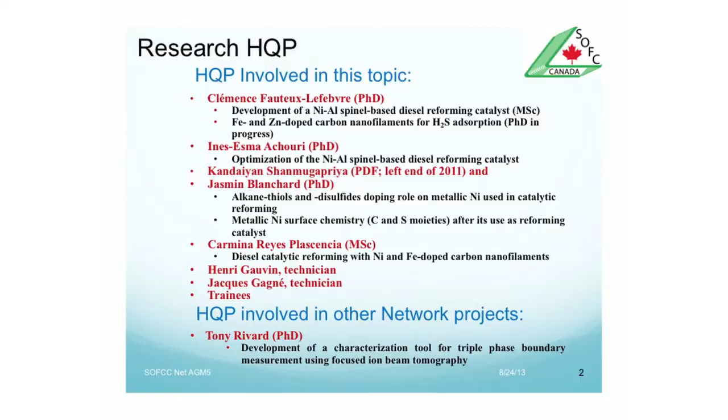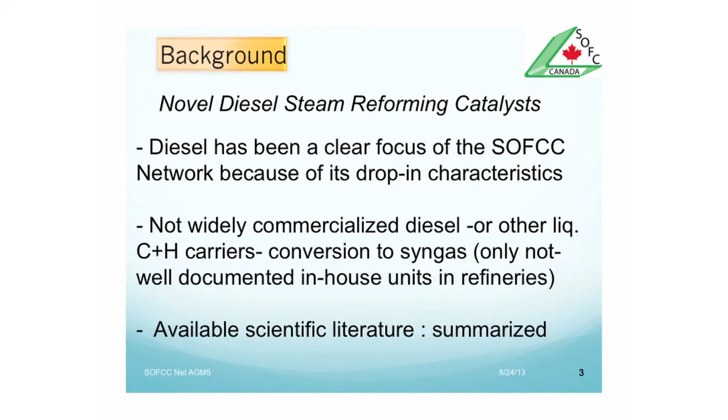So the background regarding the target of the SOFCC was to develop novel steam reforming catalysts. The reason for the focus of the network on diesel is because diesel has very good drop-in fuel characteristics, and diesel conversion to syngas technologies are not widely commercialized. There are only in-house technologies developed by refineries which are not essentially publicized or documented in the scientific literature, as well as other components like methane. And there is some scientific literature which will be summarized.

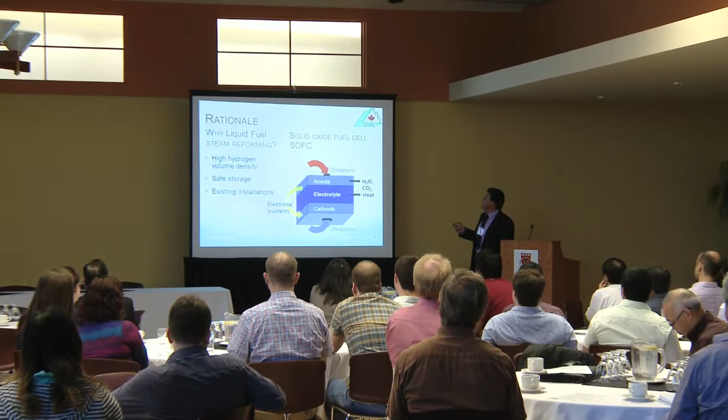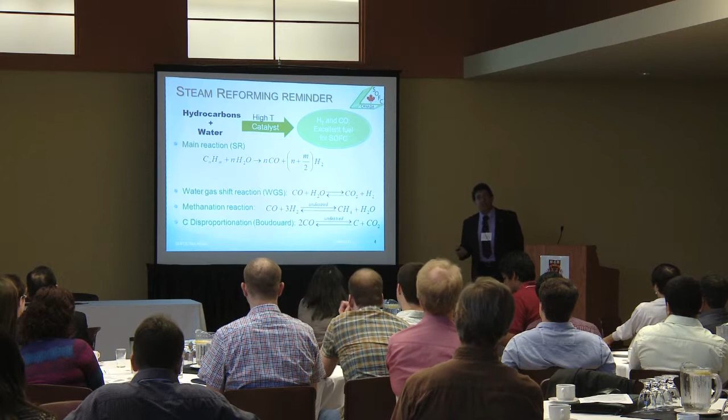So steam reforming reminder, I will go fast on this. We have hydrocarbons and water, high temperature and catalyst, and we produce a mixture of synthesis gas, which is essentially hydrogen and CO. The main reaction is this one, and there are side reactions, desired and undesired. The water gas shift is desired when we want to decrease the amount of CO and increase the amount of hydrogen, used mainly for other types of fuel cells. In the case of SOFC, it's not so important. Methanation, converting CO and hydrogen to methane, is undesired; the reverse is desired. And disproportionation is also undesired because it produces carbon which is deposited at the surface of the catalyst and poisons the catalyst.

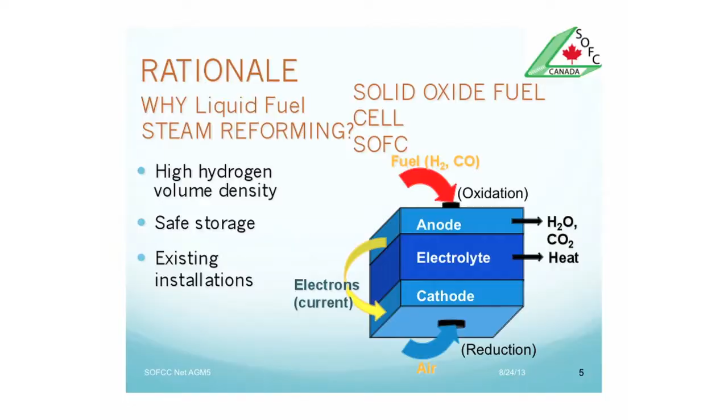So the rationale for liquid fuel steam reforming: we have hydrogen volume density, safe storage and existing installations. So having technologies able to convert this type of liquid hydrocarbons into energy carriers for SOFC is the target. So why do we need a new catalyst? Are the catalysts available in the literature appropriate for this? The answer is no, for different reasons.

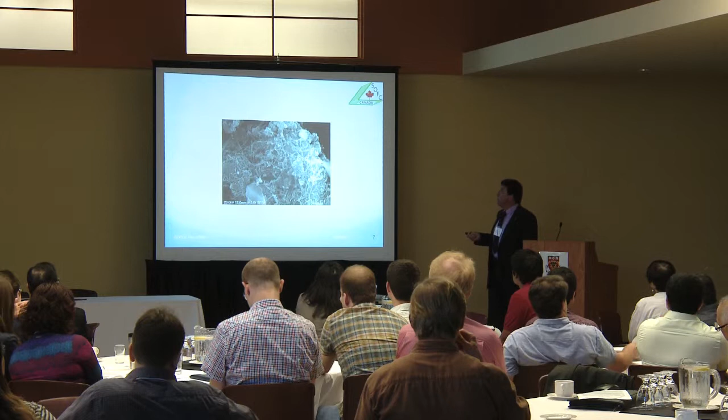Also, another type of carbon which is deposited at the catalyst is the filamentous form, like this one. It also poisons the catalyst, not as much as the pyrolytic, but it is definitely something which is hindering the process of reforming.

So if we go to the literature review and make a wrap-up, we see that we have three types of catalysts: nickel-based, metals of the 8th group of the periodic table of elements, and non-metallic catalysts. The nickel-based are essentially ceramic supported, alkali promoted, or alloys with copper and silver. I will not go into details, but the ceramic supported are the ones which are commercialized, mainly using alumina, but more and more it is known that yttria-stabilized zirconia or nano zirconia is a support of very high importance for reasons I will explain later.

Alkali promoters were used and are commercially available for decreasing the amount of carbon. However, the alkalis devolatilize at high temperature and the catalyst loses its activity, but at the same time we have deposition of alkalis in other places of the system. And the alloys which have been used have lower efficiency.

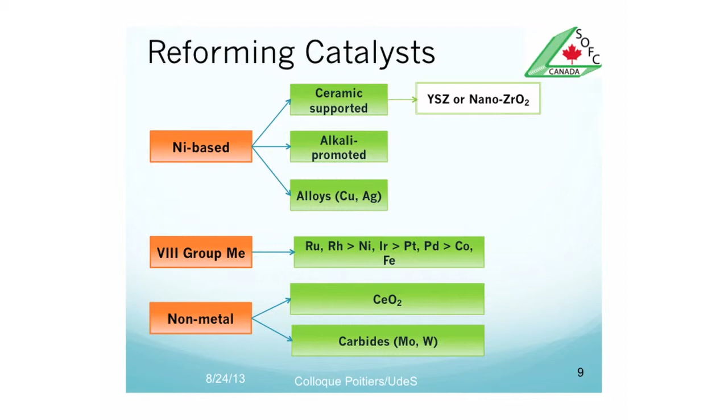The other metals which were tried, and with success, are the noble metals. Very expensive, and at the same time poisoning due to heteroatoms like sulfur is not hindered by this type of metals. And the non-metallic, that is ceria, can be a catalyst as it is, but the activity is 2 orders of magnitude lower. And the carbides, which are very efficient but at high pressures. If we have lower pressures, then the carbides lose their consistency and they break down.

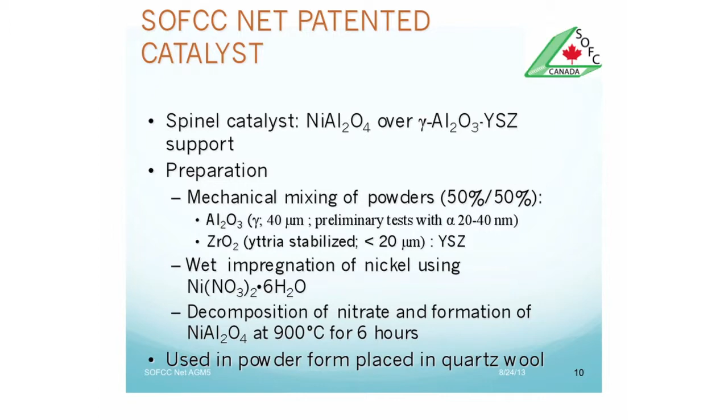So in our work, I will not go into details, but I will explain how we have worked on this. The decision was taken to work with spinels, at the moment where all the literature indicated that spinel is not a good phase to make a catalyst. Spinel is instead a nuisance for the catalyst. We decided to check the spinel efficiency, and we prepared it on gamma alumina and yttria stabilized zirconia supports. The production was made easily and conventionally through wet impregnation, decomposition of nitrates and formation of the spinel phase at 900 degrees for 6 hours, and it has been used in powder form in quartz wool.

This is the configuration of the reactor. It's a packed bed, very simple. Hydrocarbons and water are mixed at liquid state using a surfactant at the appropriate ratio. And we have used argon for 3 reasons: as an energy provider to disperse the liquid phase, as an internal standard for the analysis, and at the same time as a means of controlling the gas hourly space velocity.

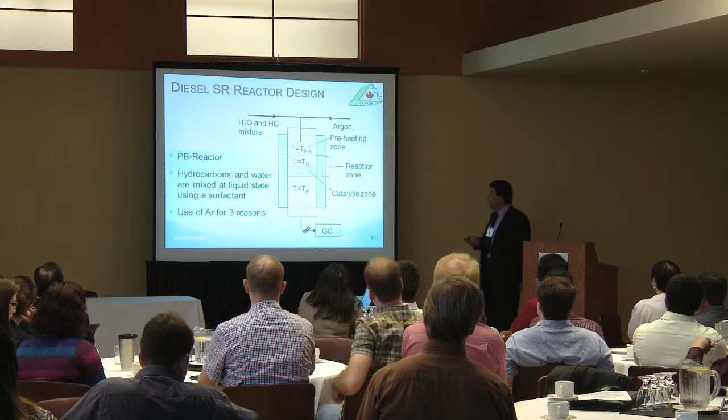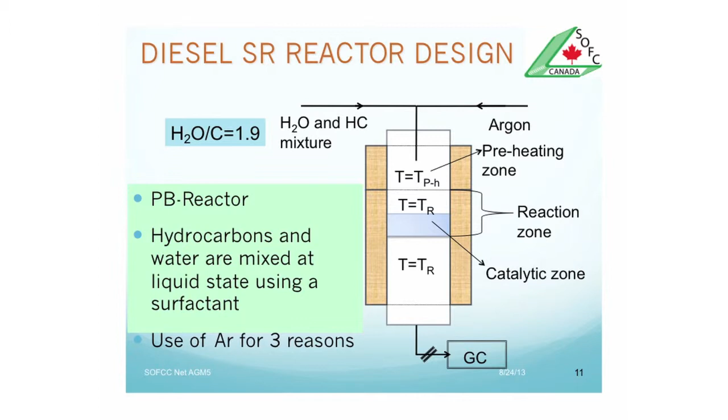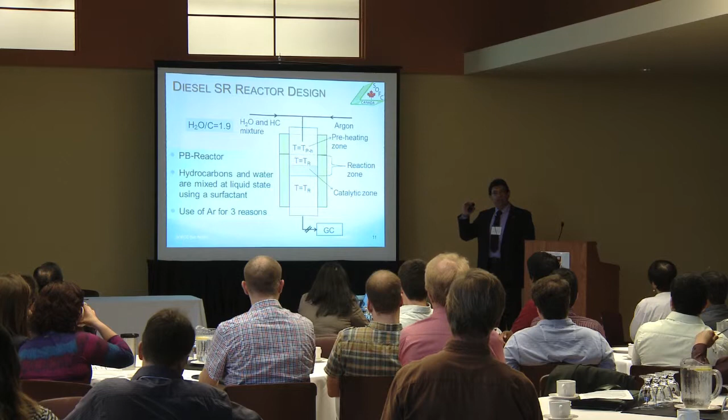Then, a very important thing: water surplus is a nuisance for every type of reforming. In the industry, they use ratios between 3 and 4. In SOFCs, we can use the same ratio, but the energetic efficiency of the apparatus decreases. So the target was to use ratios as low as possible, and all that you will see has been done at ratios lower than 2. I remind you that the stoichiometric ratio for the reforming reaction is 1, and 2 is the minimum we can accept in the industry, but 3 and 4 are used in order to provide a catalyst lifespan of typically more than 1,000 hours.

So this has been tested. The catalyst has been tested with hexadecane as a surrogate of diesel with very good results. Then we switched to commercial diesel, and we obtained very, very good results at very low temperatures and relatively acceptable gas hourly space velocities. This means typically less than 1 second residence time of the reactive gas.

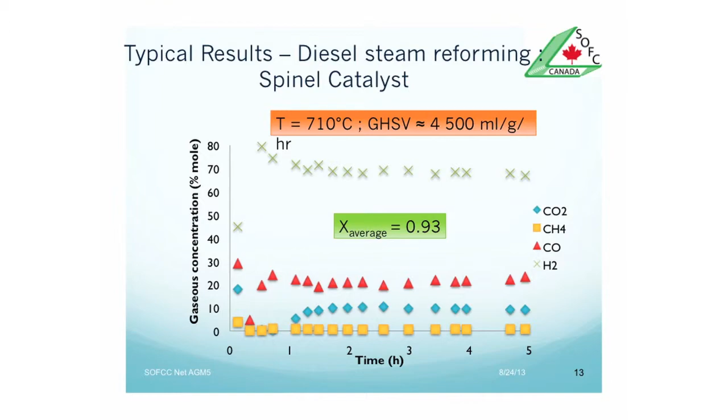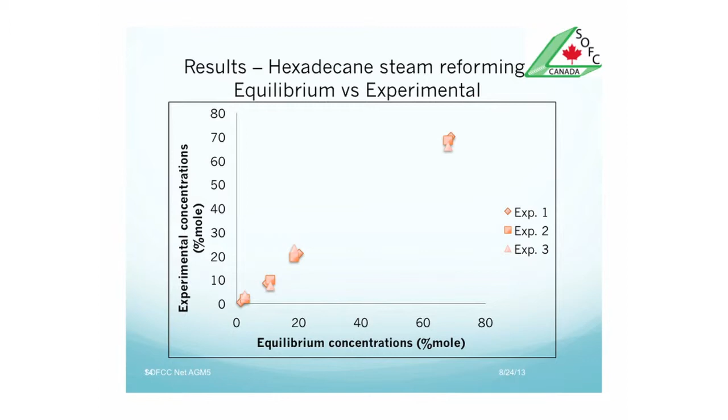I will not show you other results, but I can tell you that at 750, 760, with commercial diesel containing typically sulfur between 10 and 15 ppm, we can obtain 100% conversion of diesel. And if we compare with equilibrium, we see the different points representing hydrogen, CO, CO2, and methane. We are falling exactly at the equilibrium conditions, which means that the gas hourly space velocity used for this type of reaction is appropriate to get equilibrium.

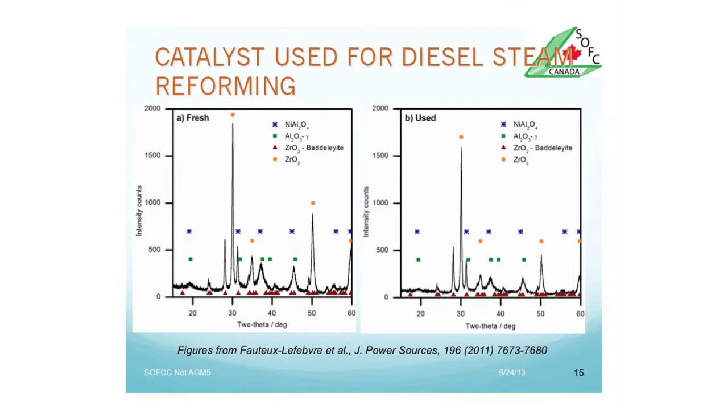So if we test the catalyst before and after, we can clearly see that there is no nickel, there is no nickel oxide, there is only spinel phase deposited on alumina and zirconia. You see that there are 2 types of zirconias. This is a big, big topic, and the continuation of my work is essentially there. The zirconias which are sold in the market, containing yttria for stabilizing the zirconia, contain a lot of phases, and nobody has searched this field thoroughly. And I believe, after having done a lot of work on this, that this is a big, big area of research in order to improve catalysts, not only in this case, but in other cases.

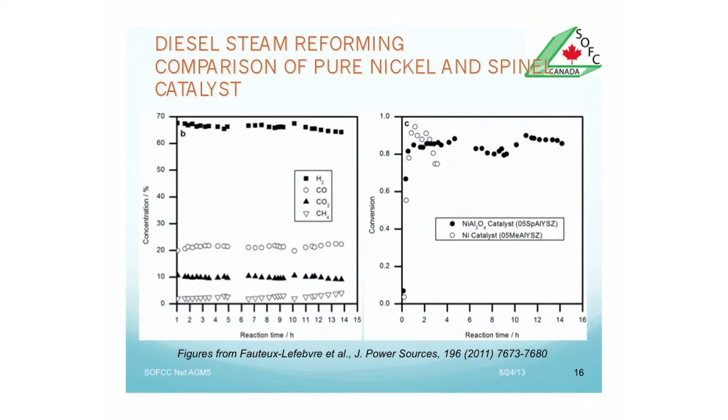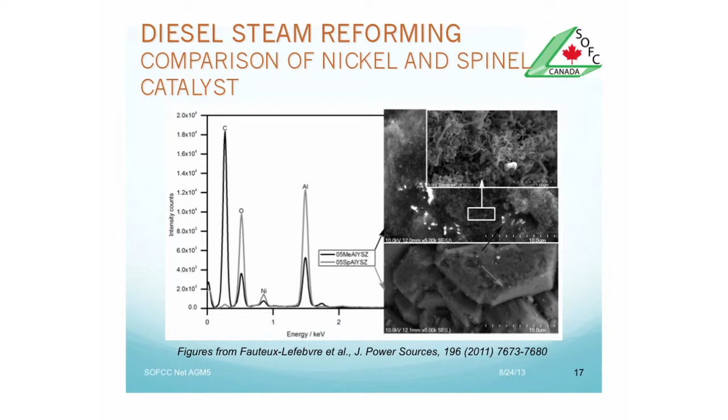So if we compare this catalyst with a catalyst of metallic nickel deposited on alumina and zirconia, exactly the same thing, we clearly see that the metallic nickel initially gives a very high efficiency, then it drops fast because we have formation of carbon, while the spinel catalyst is very efficient and provides stability over about 15 hours. And if we go to scanning electron microscopy coupled with EDX, we clearly see that there is filamentous carbon formed on the nickel, not on the spinel, and the carbon signal is inexistent in the case of the spinel.

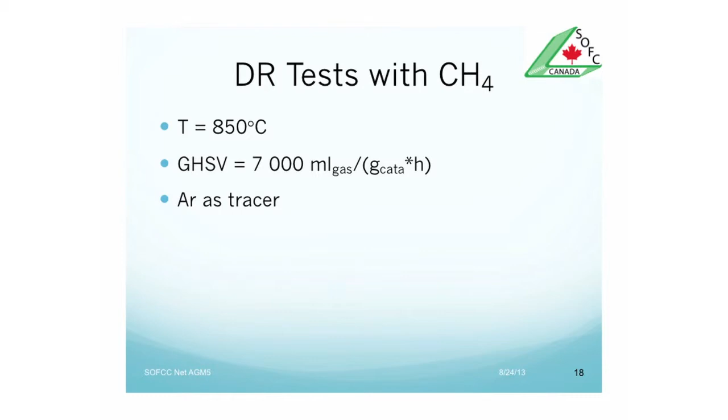So, very new results, not belonging to this network because they have been done after the end of the network. We have done some work testing the catalyst at 850, with gas hourly space velocity almost double, and using argon as a tracer, for dry reforming of methane, which is even more difficult to reform than diesel.

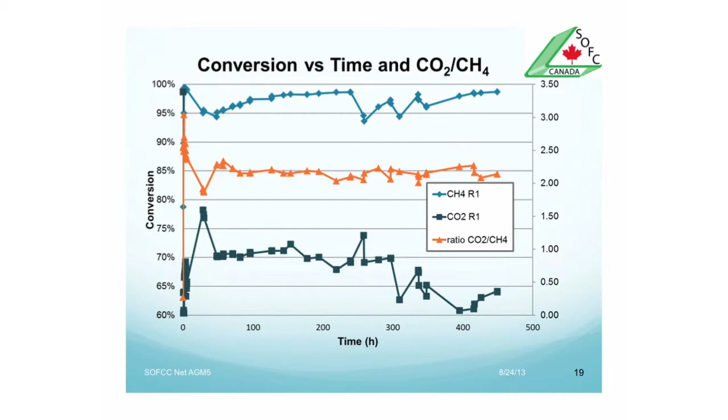And the results stand for about 450 hours. And the catalysts show a very amazing stability over time. The peaks you see here are due to electricity problems. We had some stops, and when we restarted the reaction, we got back the initial efficiency. So this is a very important result for the commercialization of the catalyst.

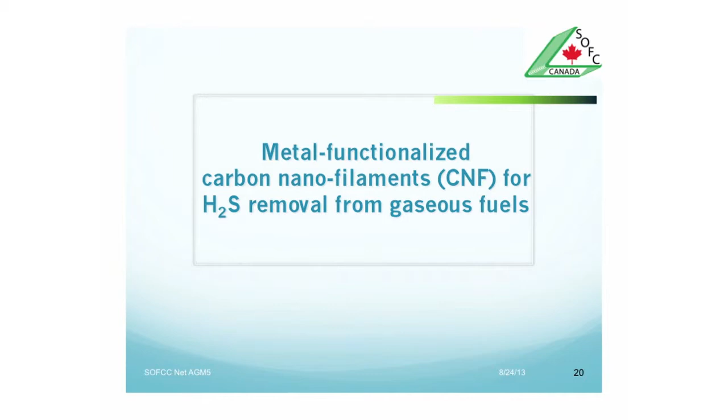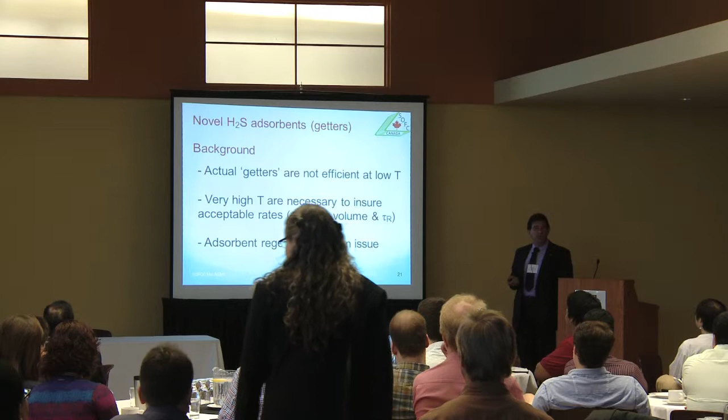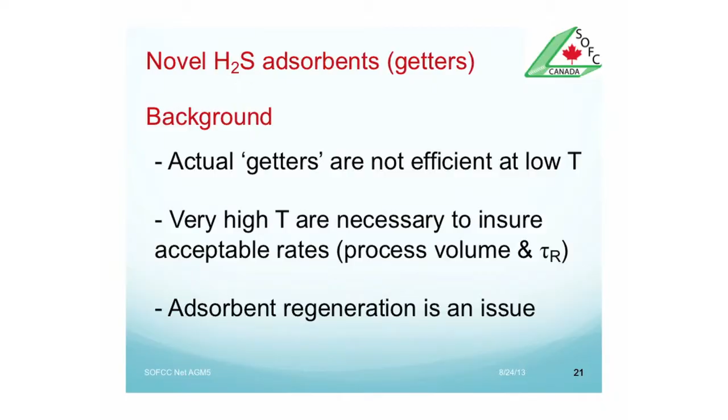So the second thing we have started developing and are now continuing is to use metal-functionalized carbon nanofilaments for hydrogen sulfide removal from gaseous fuels. Why? Actual getters are not efficient at low T. People in the industry know that. We typically have to go over 500 degrees. Very high temperatures are necessary to ensure acceptable rates, which affect process volume and residence time. And adsorbent regeneration is a big issue, not easy all the time.

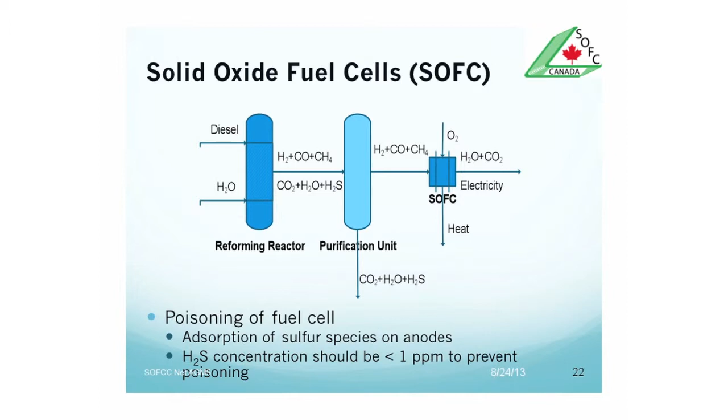So in the case of solid oxide fuel cells, let's say we have a catalyst converting low sulfur diesel with water, the catalyst I have shown you before. Then we have to purify this before getting to the SOFC, because sulfur, even at small quantities, typically higher than 1 ppm, is detrimental to the anode and the other components of the fuel cell. So we are working in this area.

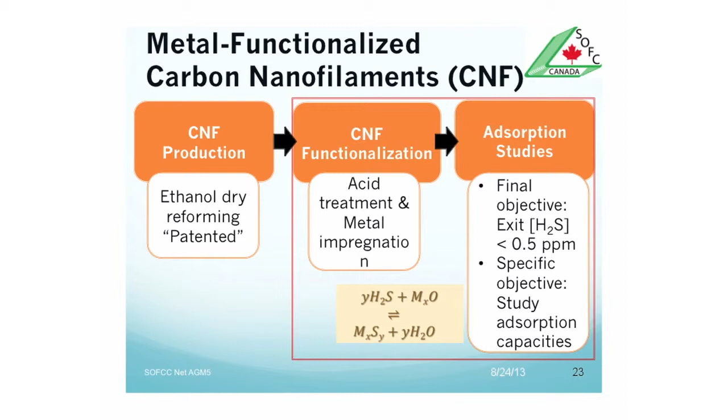So how do we do that? Production of carbon nanofilaments in-house, using a patented process through ethanol dry reforming. Then the carbon nanofilaments are functionalized by acid treatment to introduce oxygen anchors, followed by metal impregnation. And finally, the adsorption studies. So essentially, this is the PhD topic of Clémence.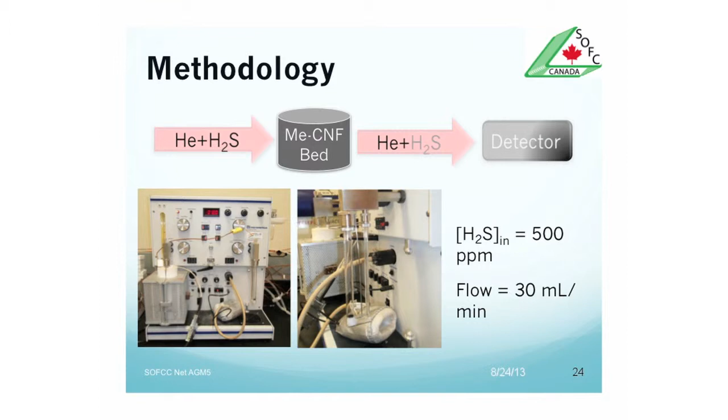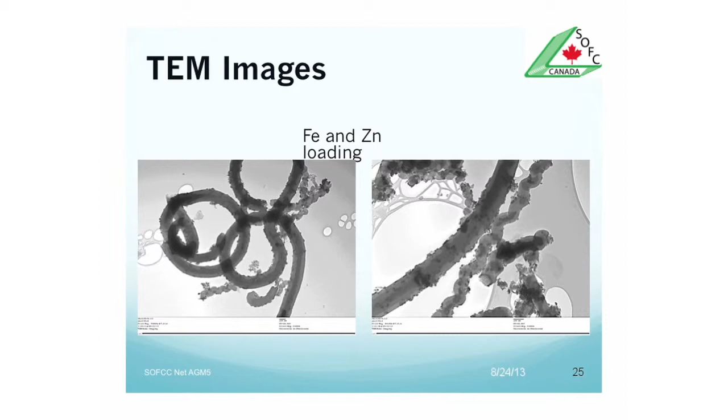The methodology is shown here. This is the equipment we use. It's a commercial one. We start with hydrogen sulfide at 500 ppm and a flow of 30 milliliters per minute. These are typical transmission electron microscopy pictures of iron and zinc loaded carbon nanofilaments. I have no time to show you all the results, but I will show you how it compares with commercial systems. We found these results in the literature, and we have ordered some of these commercial ones to do the same thing in-house.

So these are results we got with our system at a temperature of 300 degrees. If we want a gas starting at 500 ppm to have at the exit lower than 1.5 ppm, which is the acceptable level for feeding the SOFC appropriately, we have a capacity between 30 and 40 grams of sulfur per 100 grams. So it's a percentage of the sulfur that can be taken up by the adsorbent.

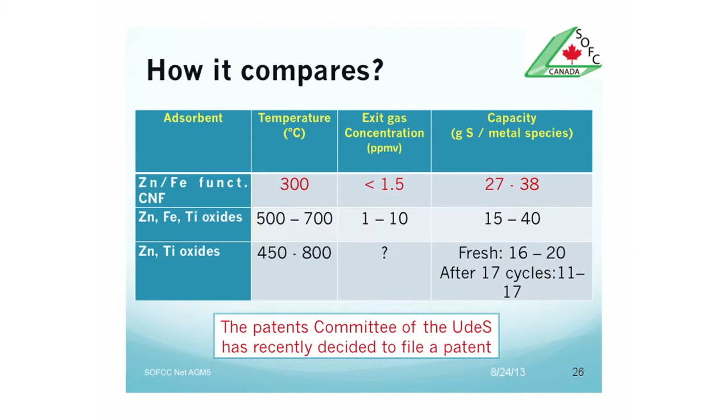And this is what happens in the literature with zinc, iron, and titanium oxides. They have to go between 500 and 700 degrees to get exit concentrations of 1 to 10, and the retention capacity is between 15 and 40. With other zinc and titanium oxides in the literature, at these temperatures, they don't mention this. They mention, however, that the fresh catalysts have a retention capacity typically lower than 20 and can be regenerated, and after 17 cycles lose about 10 to 20% of their capacity. So this has been presented to the Patents Committee of the University of Sherbrooke and accepted for filing a patent, which is ongoing.

And the final thing I would like to talk about is the greenhouse gas sequestration process with simultaneous production of carbon nanofilaments. We call this process dry reforming induced valorization of environmentally friendly energy carriers. The rationale is not just to do dry reforming, but sequestration coupled with reforming to have multiple streams of products. So what is this exactly? Steam reforming produces synthesis gas. This synthesis gas can produce hydrogen, be raw feedstock for industry, go to commercial products, or serve as an energy vector, for example for fuel cells.

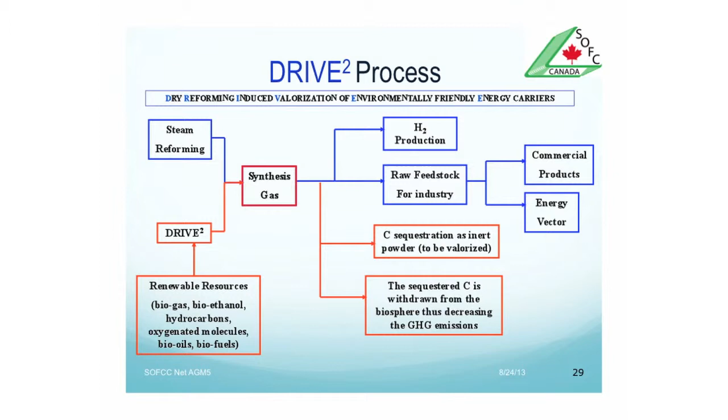If we do dry reforming, we can get synthesis gas, and at the same time from different renewable resources. This not only produces hydrogen but also does carbon sequestration as an inert powder, which can be valorized, through the work I have presented. This sequestered carbon is refractory and cannot be oxidized. If we don't burn it at very severe conditions, it is withdrawn from the biosphere, decreasing emissions.

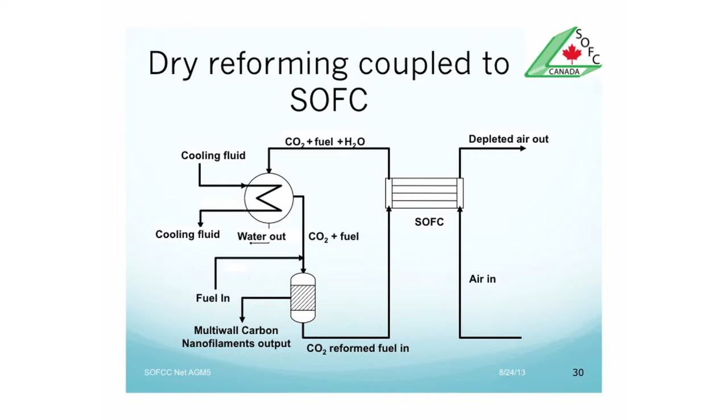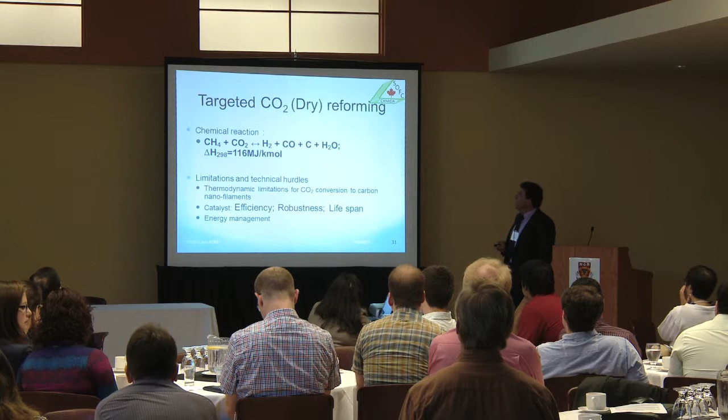If we couple this to an SOFC, we obtain this type of diagram. We have a fuel in the process, the reactor doing the dry reforming. It is fed with CO2 and unreacted fuel coming from the outlet of an SOFC. At the outlet of this process, we get CO2-reformed fuel, which feeds the SOFC to produce electricity by reacting with air. This is the reaction. If we do the thermodynamics, we see that if we operate the reactor at 550, we can get approximately 50% of the carbon contained in the CO2 as solid carbon, which can be removed from the system.

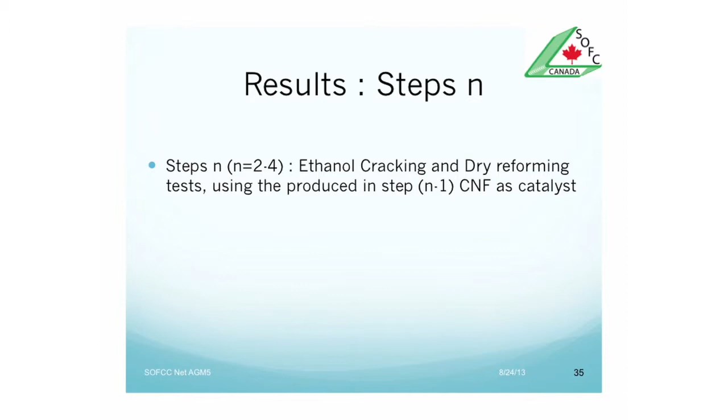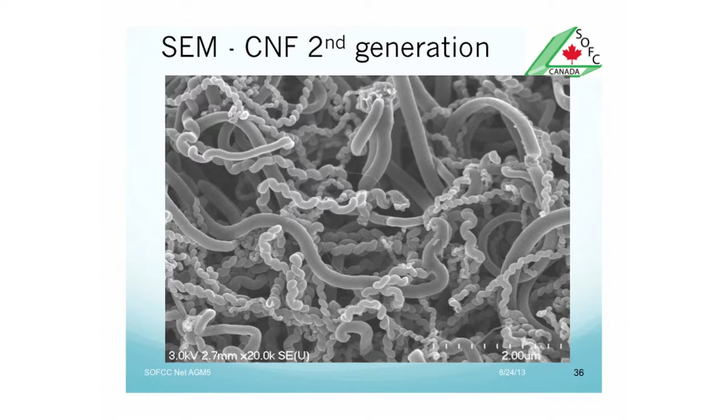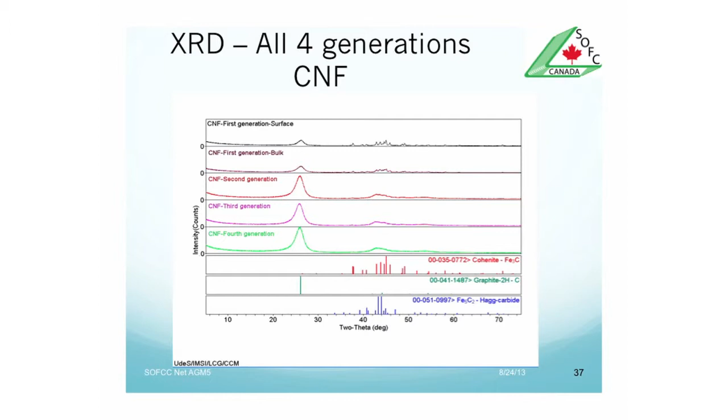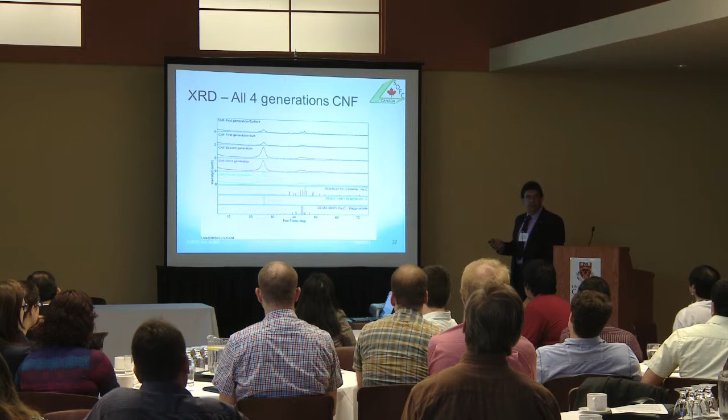These, for example, are additional carbon nanofilaments produced, and we call them second generation because they are the nanofilaments obtained when we are using the nanofilaments as catalysts. And this clearly shows through the XRD that the nanofilaments are acting as catalyst, and as we go to the additional generations, the amount of iron contained in the nanofilament decreases, and logically we have additional carbon which is obtained for less iron.

So I will stop here. I'm within time, I suppose.